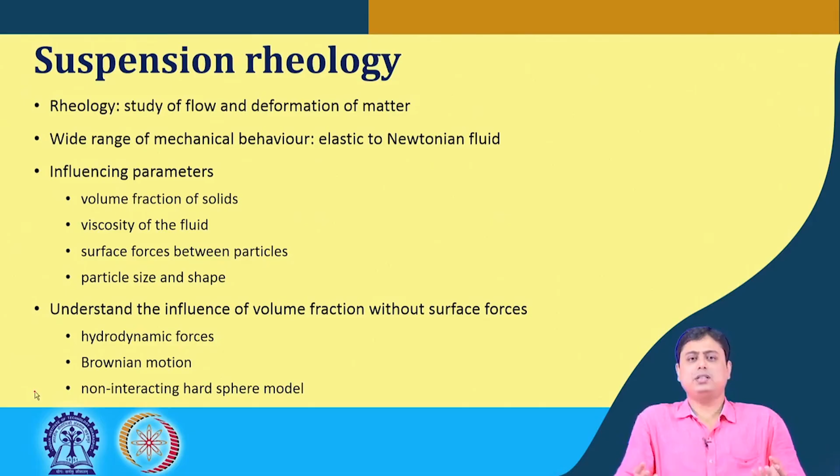First, let us understand the influence of volume fraction without any surface force or interparticle forces, which means the hydrodynamic forces are the dominant forces. This dictates the behavior of the particles including the suspension, and since we are talking about fine particles, there is movement due to Brownian motion. But these are non-interacting particles, and we typically call this approach to understand the suspension behavior the hard sphere model, meaning there is no interaction between the particles.

In this hard sphere approach, in a Newtonian liquid, the addition of spherical particles increases the viscosity due to the additional energy dissipation related to the hydrodynamic interaction between the liquid and the sphere. So as we increase the solids concentration in a Newtonian suspension, the viscosity typically increases.

Einstein proposed a relation between this suspension viscosity and the liquid viscosity, without any solid particles. In this expression, mu s is the suspension viscosity, mu l is the liquid viscosity, related by the volume fraction of solids, which is 1 minus epsilon, where epsilon is the voidage. Since epsilon is the voidage, 1 minus epsilon is naturally the volume fraction. So 2.5 times the volume fraction plus 1, multiplied by mu L, gives us mu suspension.

This expression holds true for very dilute suspensions, for when solids concentration is less than about 7% by volume. The basic assumption made while proposing this expression was that the particles are far away from each other, so there is no influence of one particle on another. That was the definition of a very dilute suspension.

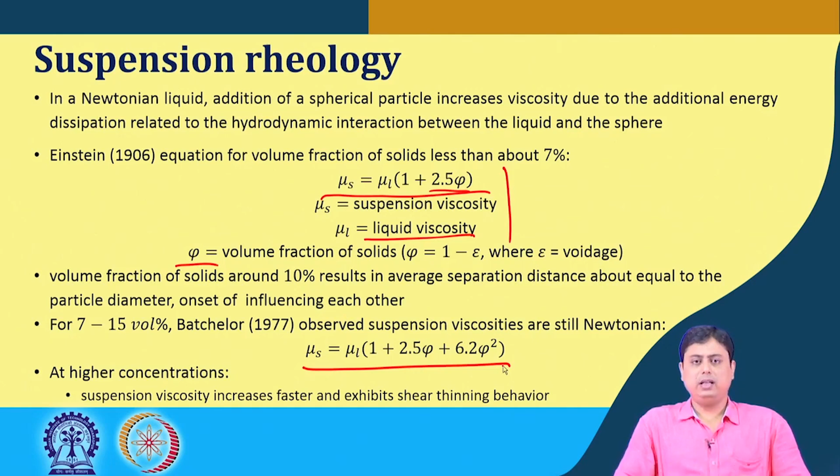So what happens here is that while at rest, this moderately concentrated suspension will have Brownian motion in the particles, and this Brownian motion actually dictates the suspension rheology. Any addition of the solids concentration in that suspension, its viscosity is dictated by that amount of concentration.

So initially for a particular concentration, it will have a Newtonian-like plateau at the lower shear rate. As the shear rate is increased, the hydrodynamic interactions become higher and more dominant than this Brownian motion, and the particles will be in a more arranged manner, a kind of layered state, also called the preferred flow structure, shown here. So from a random position of the particles, it becomes more organized, and quite naturally the viscosity becomes smoother or lower.

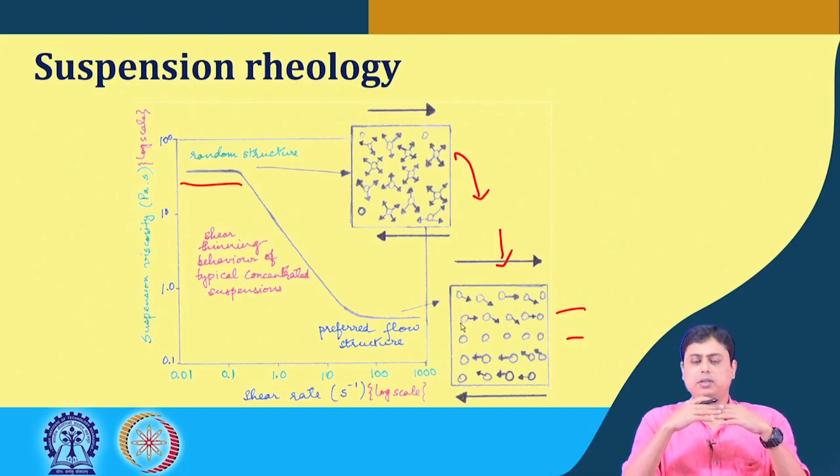So this transition from a low shear rate Newtonian plateau to a high shear rate Newtonian plateau is the shear thinning behavior. That means at lower shear rate we have the Brownian motions that dictate the suspension rheology. As we increase the shear rate, these hard spheres, meaning non-interacting particles, become more organized into sheets or layers, and then the flow becomes much smoother. That means the viscosity goes down. So this transition is the shear thinning behavior.

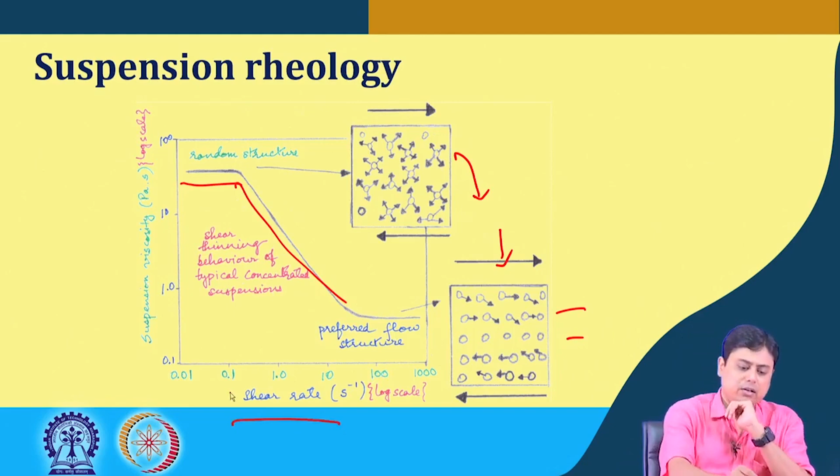So here it is the shear rate versus the suspension viscosity, both in log scale. So this is what happens in case of the non-interacting particles.

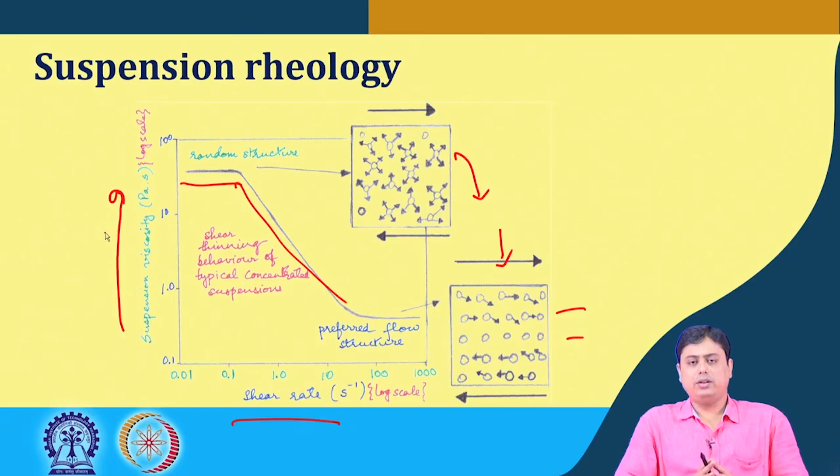Now for highly concentrated suspensions, there is no first principle model to predict the rheological behavior of such concentrations, but as in other sections we mentioned, there are several semi-empirical models available which help to understand this concentrated suspension behavior, and one of such is mentioned here, a simplified form where...

This first term represents either the low shear rate Newtonian plateau viscosity or the high shear rate Newtonian plateau viscosity. And this phi max is a fitting parameter that is considered as a measure of the maximum packing limit or packing fraction of that fine particles or powders.

So such suspension under very high shear rate and high solids concentration leads to its maximum packing fraction. What happens is that the structure that was developed, the sheets or layers developed at the high shear rate Newtonian plateau, becomes unstable, because now we have more solids concentration and very high shear rate. So this destabilizes that preferred flow state or structure.

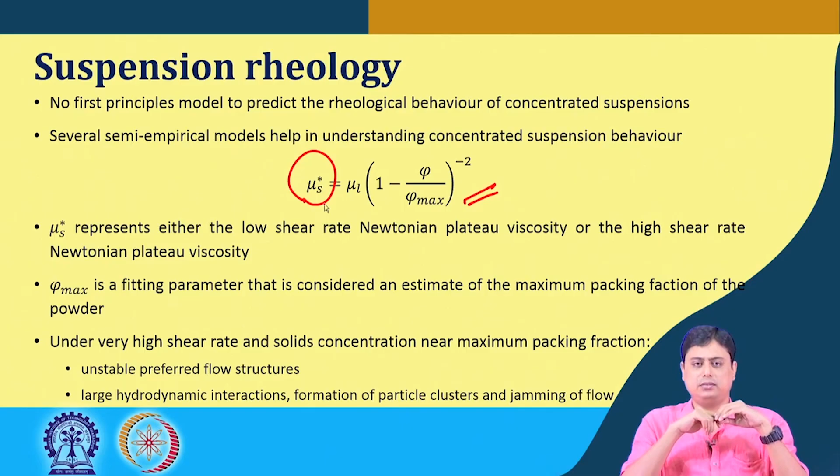There is very large hydrodynamic interaction which leads to formation of particle clusters, also called hydrodynamic clusters. These clusters make the flow more difficult, which means again the viscosity goes higher, and these clusters at times block the flow, or jam the flow. This is called the jamming phenomenon, and this whole observation is called the shear thickening behavior. That means the viscosity is now increasing as we increase the shear rate, and this is the common occurrence in case of concentrated suspension by the hard sphere approach.

So this is what happens, schematically. Here, below a certain volume fraction, it is Newtonian, meaning the viscosity does not change with the shear. Now it is having a constant viscosity system.

Now as the shear rate increases with the concentration, we have this low shear rate Newtonian plateau initially, and then it exhibits shear thinning behavior, followed by a high shear rate Newtonian plateau. This is all happening because of the rearrangement of the particles in the suspension from a Brownian state to a more organized, layered kind of state.

So with the increasing shear there is a smooth movement of the fluid, but at very high shear, this high shear rate Newtonian plateau is arrived when it has reached this preferred flow structure limit. For a time being this state is not further improved, or there is no space to improve it further, which means that stage remains for a certain time. That also depends on the particle type.

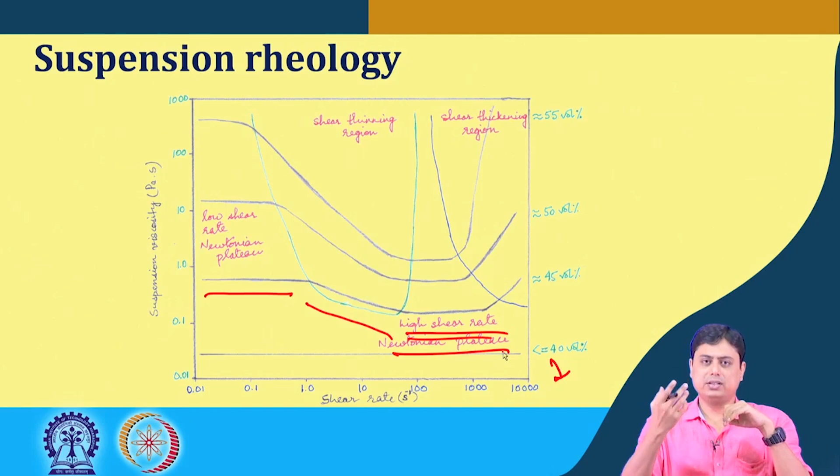After that, viscosity again increases because this preferred state is now unstable due to higher concentration, or this happens due to high shear rate. We can see that this state becomes narrower as we increase the concentration, that this high shear rate Newtonian plateau and the onset of shear thickening regime goes higher and higher.

So these lines are basically showing a zone of shear thinning, and this is the shear thickening zone. In this region we can see the viscosity is going down, and in this region we can see the viscosity is going higher.

This is all happening again due to particle rearrangement in layers, and after that, that layer is broken due to high hydrodynamic interaction, which leads to clusters or aggregates of particles, called hydrodynamic clusters. This then blocks the flow and makes it more difficult.

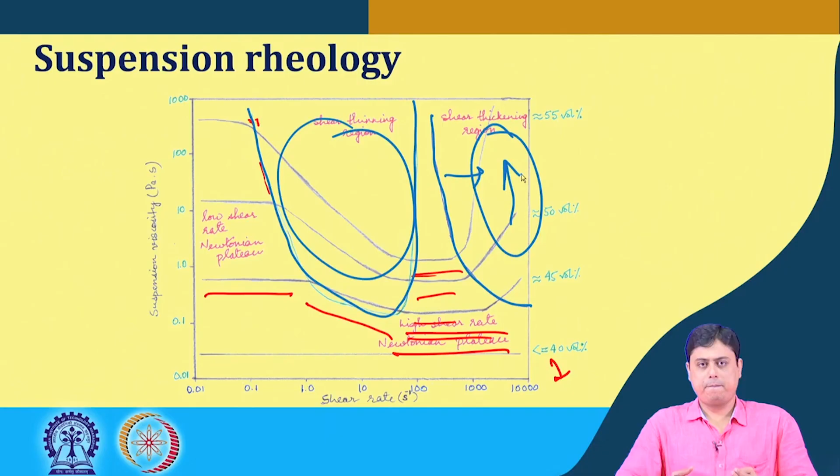Now, when there are repulsive forces between particles in suspension, it behaves similarly to the hard sphere approach when they are separated at a larger distance in the range of repulsive force, because then proper dispersion occurs, since we have seen that attractive force tends to form aggregates.

If particles are separated at a long range repulsive force, they are more dispersive in nature, or more uniform dispersion can happen with these repulsive forces. This is true for low volume fraction or relatively large particles, because at low volume fraction these particles are separated far from each other. Once we increase the volume fraction, there is overlapping of this repulsive force field, which leads to increased viscosity compared to the hard sphere.

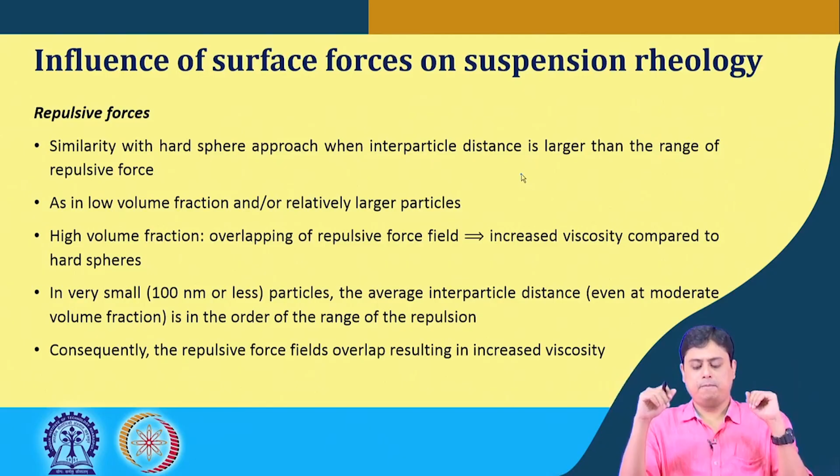Also, for dilute suspension of repulsive particles, we will have larger viscosity than hard spheres, because of additional viscous dissipation of fluid flow through the repulsive region around the particle. Such phenomena in case of suspensions having an electric double layer is called the primary electroviscous effect. Even in very dilute suspension of particles, there would be larger viscosity, although the behavior is similar, compared to simple hard spheres, because of this additional viscous dissipation in the repulsive force field.

So a suspension having an electric double layer—this phenomenon is called the primary electroviscous effect—and the total drag on the particle and the EDL is greater than the drag considered in the case of the simple hard sphere model. However, there is an insignificant increase in viscosity due to this primary electroviscous effect.

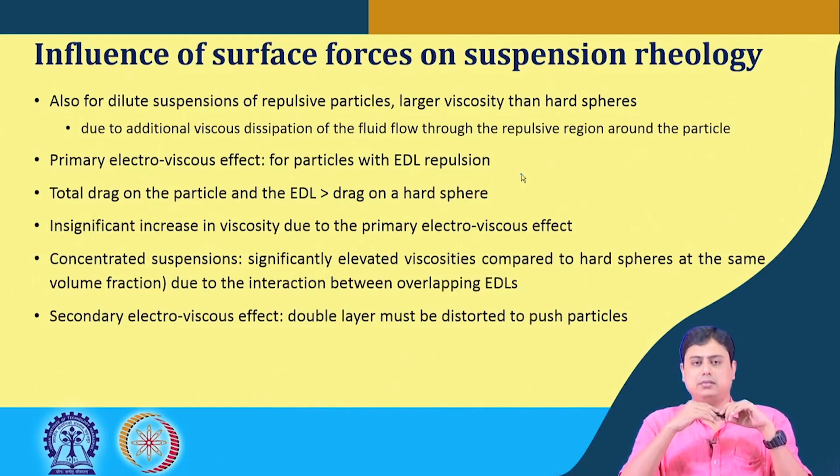Now, when concentration goes higher with such particles, there is significantly elevated viscosity compared to the hard sphere model of the same volume fraction and material, due to interaction between overlapping EDLs. In the ideal suspension, the EDLs overlap, creating tremendous repulsion. So when we try to push the particles closer, the electrical double layer must be distorted in order to keep them in contact, and that phenomenon is called the secondary electroviscous effect.

The influence of repulsive force in suspension can also be measured in terms of effective volume fraction of the particle. What is effective volume fraction? It is the volume fraction of the particle plus the fraction of volume occupied by the repulsive region around the particle, this EDL layer.

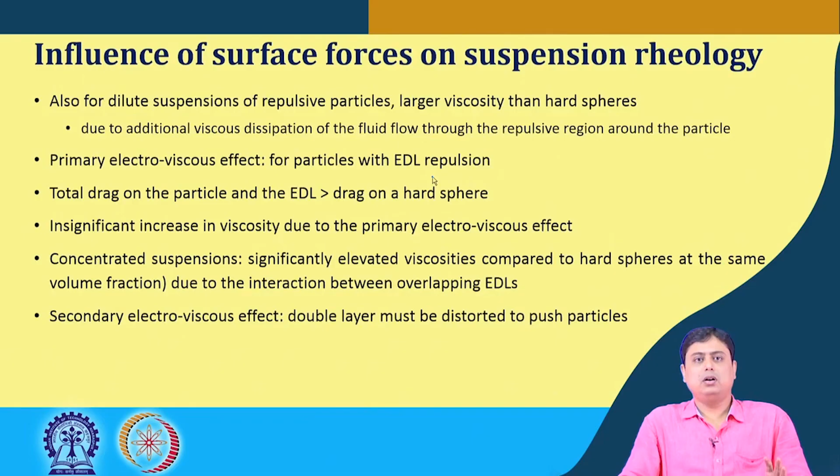So the volume fraction of the particles plus the fraction of volume occupied by the repulsive region around the particle is the effective volume. Now, the previous expression we saw for concentrated suspension, if we replace phi with phi effective, it actually predicts the behavior of such suspension.

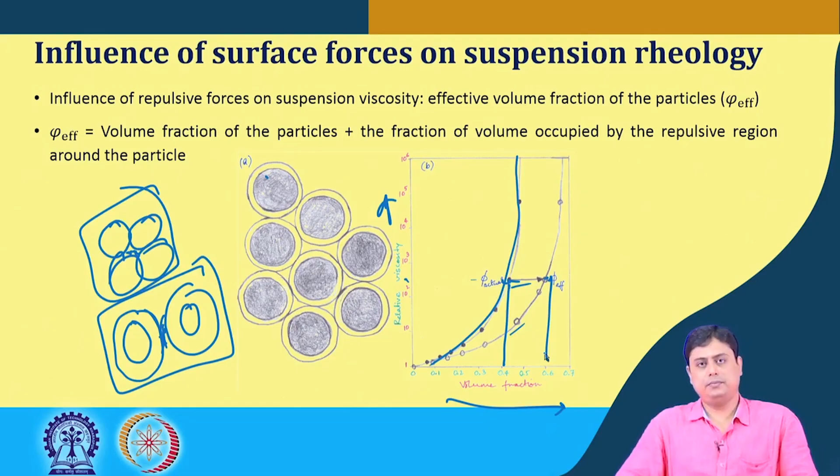This schematic shows volume fraction versus relative viscosity, where this axis is the actual volume fraction and this is the effective volume fraction. So for a particular relative viscosity, we have a higher effective limit volume fraction. For the actual volume fraction, we have a higher effective volume because of these layers or the force field that is there.

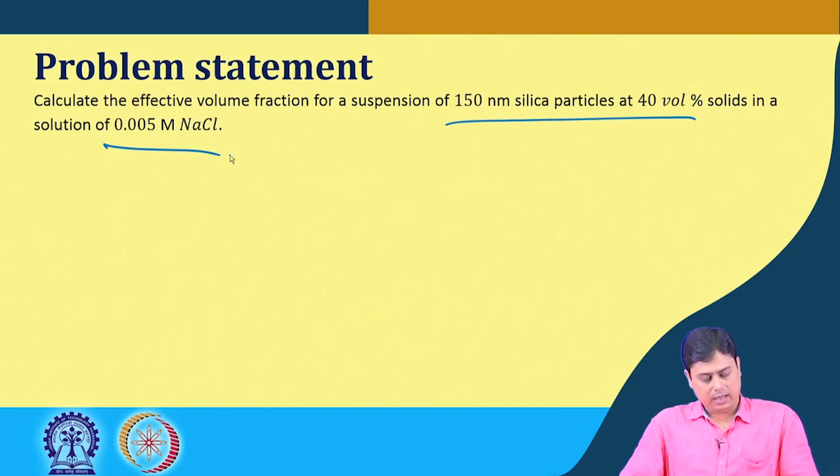So how does it matter? Consider this problem statement: calculate the effective volume fraction for a suspension of 150 nanometer silica particles at 40 volume percent solids in a solution of 0.005 molar. So this is the actual volume fraction of silica particles of known diameter in electrolyte. What is the effective volume fraction? How do we calculate this?

Using the knowledge we just saw, phi effective is basically the volume of solid plus the excluded volume, which we did not take into account but is there when it is immersed in the electrolyte, divided by the total volume.

For particles stabilized by EDL repulsion, the excluded volume from the range of repulsion can be estimated by the Debye length, which we have seen earlier as a measure of the range of this EDL force as well as its thickness.

So the inverse Debye length, as a function of salt concentration, for monovalent salt follows the relation we saw earlier, which provides this inverse Debye length.

For 0.005 molar NaCl, we get this value as kappa, which means the Debye length, the inverse of that, is 4.3 nanometers.

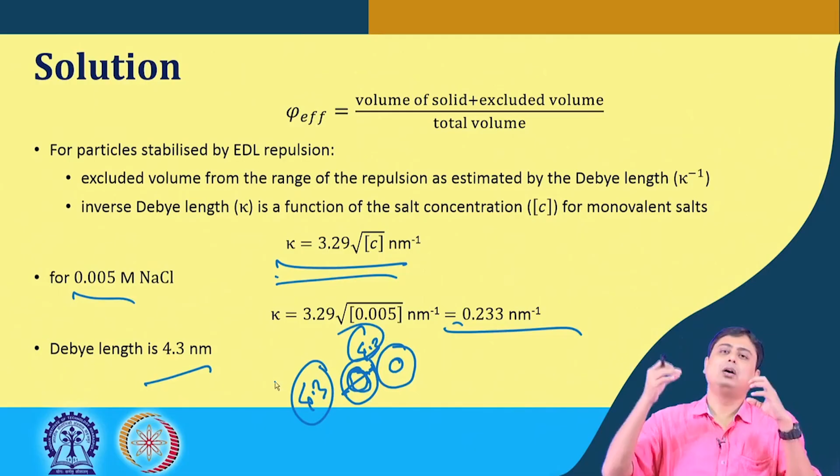So the effective diameter becomes its original diameter, 150 nanometers, plus 4.3 plus 4.3, and in such a manner all other particles are arranged. For only one particle, if we consider just one, the volume of a single particle is this one.

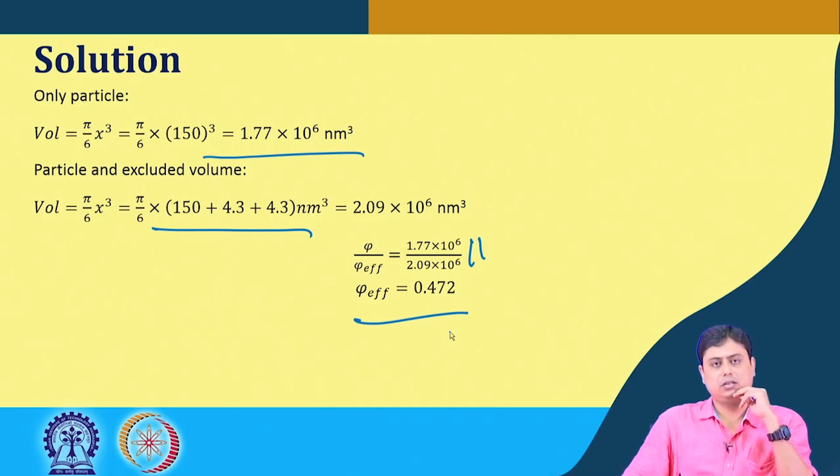But the particle with the excluded volume—excluded meaning excluded during the consideration of calculating its volume fraction—would be this one, and the ratio of these two gives us the effective volume fraction. So this is how this knowledge is useful in this case.

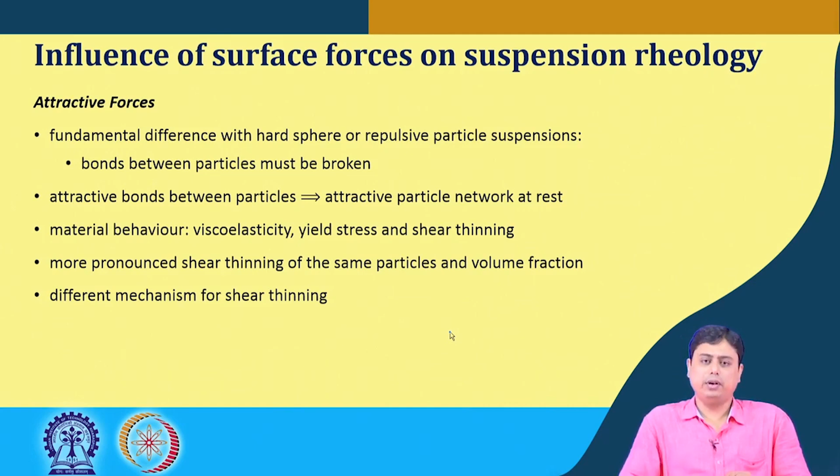Now we will see what happens in case of attractive forces. After the hard sphere approach, we saw that if particles are repulsive in nature, it behaves similarly. But what happens in case of attractive particles? We will continue this in our next class, and see how the overall influence of these forces happens in a particular case, such as sedimentation, which is liquid-solid separation—one of our initial intentions—and how this knowledge helps from that perspective.